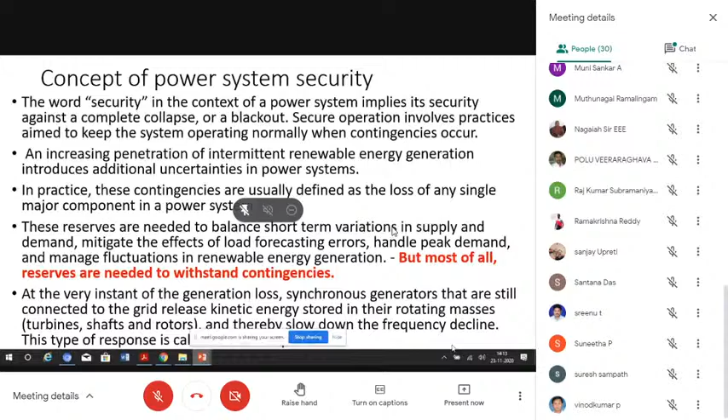If that is disconnected from the grid, or a big load is coming into the grid, then I can say it's a change, a contingency. So how was it managed in the past? Since the generation is a few hundred kilometers away from the load center, there was a big inductance. The inertia associated with the inductance, the high reactance, can itself handle small changes.

That is one thing. Or the big rotating mass associated with the synchronous generator, the rotor of several generators. Let us say hundreds of generators are connected to the main grid. Frequency will not change at all, because a big mass rotating at very high speed, 1,500 RPM, has huge kinetic energy. When there's a small change in load or generation, loss of generation or addition of load, or the reverse.

So when there's a small change, the huge rotating mass directly associated with the synchronous generator will take care. The kinetic energy stored in the rotor will start to supply the energy for the time being. So the frequency and the rate of change of frequency will not change for a moment; the energy will be supplied from the kinetic energy of the rotating mass. This was the case.

Now we are slowly moving towards power electronic converter based power systems. That is our present microgrid. See, I can tell you one very important figure.

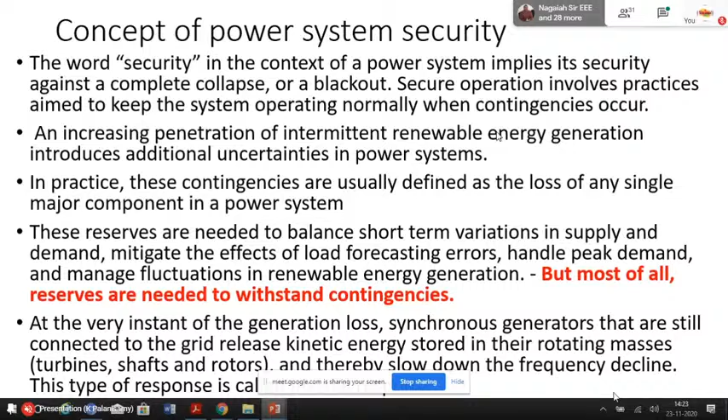So these are the issues, right? And all these discussions are going to take care of that. See, the challenges are enormous, but I'm going to deal with very few challenges. As I told you, the main challenge comes from the displacement of conventional synchronous generators by power electronic converter based RES, whether it is solar PV or wind or whatever renewable energy sources you consider. It is mostly power electronic based, right? Induction generators are very less in quantity as well as overall rating.

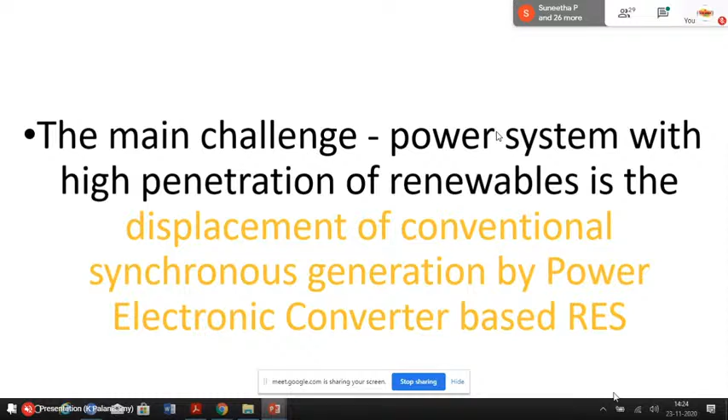Now try to understand. I told you about inertia, right? Kinetic energy and inertia. The kinetic energy E equals half J omega squared. So kinetic energy E is in megawatt seconds, right? Because of this, when there's a change, immediately the kinetic energy stored in the big rotating mass will come into picture. J is the moment of inertia, related to the system, and omega is the angular velocity of the rotor. Higher the rotor speed, the higher the kinetic energy.

That's what I feel about the flywheel, right? In recent years, many energy storage engineers are talking about the flywheel. Mostly flywheels are kept in a vacuum, and made of very light material which can handle very high energy, like reinforced rubber or polymer. Those things can be used at very high speed, right?

And to avoid mechanical losses, it will not be attached to bearings; it will be suspended by something like magnetic levitation. So it runs at very high speed in a vacuum with no friction. When you run at very high speed, it can store more energy, and immediately when you need it, it can supply. That's the kind of flywheel mechanism we are going to have, or are having in some places. Inertia constants for different machines are listed here: thermal, hydraulic. And you can understand it is per MVA. If it is 1000 MVA, per MVA.

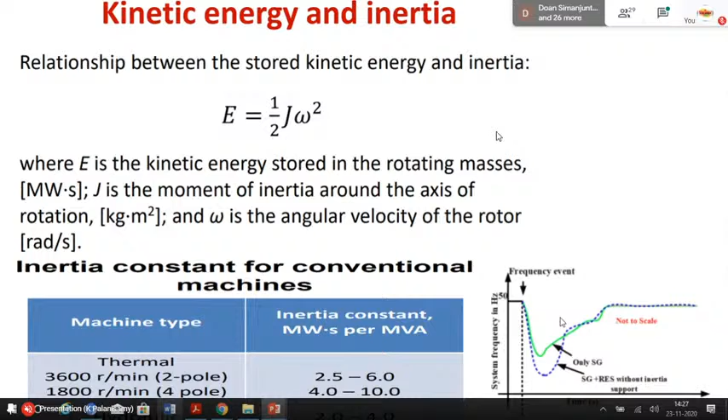Of course, this is the time you are supposed to manage. Okay, right. Now, see, we are discussing about the inertia. That is, absolutely no doubt, a very big problem.

The second one is this, California duck curve, right? What is it? This is actually a load curve. They are talking about the load, or you can say the generation. You can take anything. So from 12 a.m. to 12 midnight, so it means midnight to this midnight.

See, night time, the load is somewhere around 20,000 to 19,000 megawatt, and from 6 a.m. onwards, the California state or region is having more and more rooftop solar PV. They recently added it to a very high extent, it started from 2013, and you can see the decreasing of demand, or the decreasing of required load.

By 2020, it reached somewhere around 12,000 megawatt, but in 2012 or 13 it was around 19,000 megawatt, even more. So somewhere around 8,000 megawatt rooftop solar PV is contributing. So at the mid of the day, somewhere around 11 to 2 p.m., you can see the generation from the solar PV is very good. So you have less demand, right?

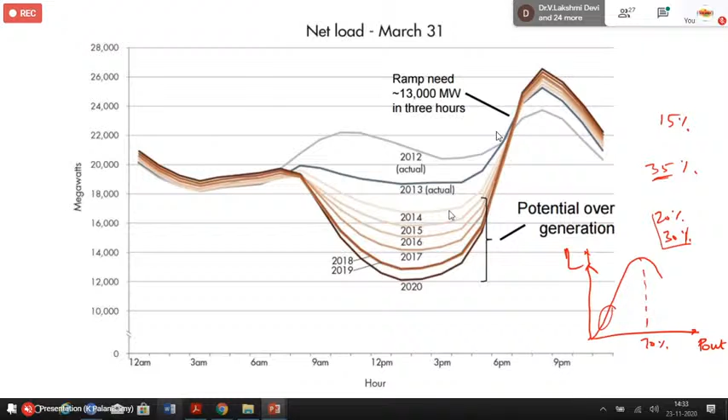Okay, next. See, the curve I have explained was first obtained by researchers from the California state load curve. That's why it is called the California duck curve. And this is what I explained, how the demand increases during the evening time, how we are going to meet it, and different solutions for that were discussed in the literature. Okay.

Anyway, since I was talking about California, you may be thinking that it does not apply to India. You can see this. This is measured by me. I'm a certified energy auditor by the government, covering most of the northern Tamil Nadu region. It was monitored on 22/8/2019, last year, at one of the agro plants. It is actually a milk processing industry, and they have 2 megawatts of solar rooftop PV, and their total demand is somewhere around 3.5 MVA.

In one day, you can see that somewhere around 6 a.m. it is starting, and it is going like this. See how badly it is changing. The first 3 are individual phase output power of one particular solar unit. They have 3 or 4 units like this. I told you it is 2 megawatts, and we have taken from one unit. The maximum power is somewhere around 700 kilowatts altogether, 3 phase. But see here, it is varying between 700 kilowatts and 250. It is changing like this.

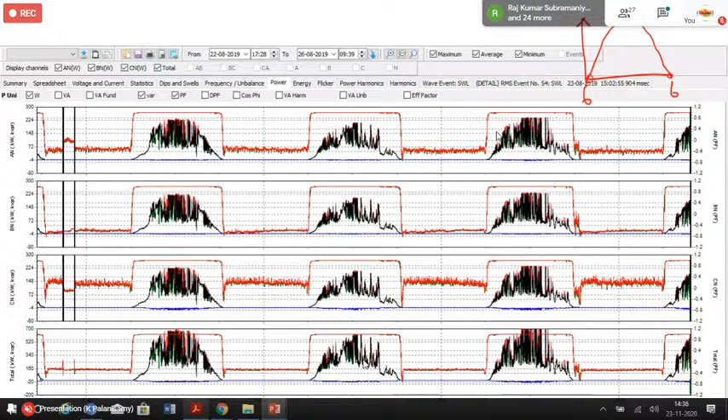But in a real scenario, this is the solar power generation. So you can understand how much lagging we are, right? Even in daytime, from 11 to 1, the so-called peak generation period of solar PV, it is generating like this. It is highly random, highly varying. So you can understand how difficult it is for the grid operator to manage this kind of generation and the overall

load demand, right? And the same thing we have expanded for one particular hour. It is somewhere around 12:15 to 13:58, so around 1.5 hours. Within 1.5 hours, just see here. Of course, this is the total power. It is reaching somewhere around 550 or 560 kilowatt, and suddenly it is coming to around 180 kilowatt. See here how badly it is varying, right?

The black is active power, red is power factor, and the blue is reactive power. See, this is reactive power. So this is unity power factor. See here, it is 1.15 to 0.85. The good thing about solar plants is they will always operate at 0.99 or 1 power factor. That's very good.

And also it will not take much reactive power. Sometimes it will supply, or very little reactive power will be taken by the PV plant. And this is actually the active power. So you can see how badly the active power is varying, right?

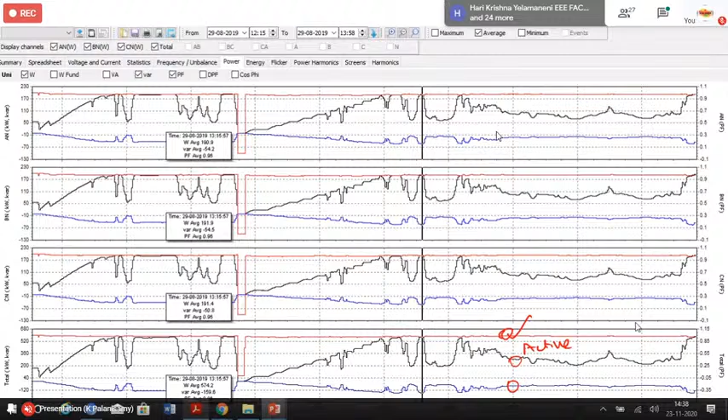Being an academic institute, a university, you may think, sir, you are telling a lie. How can the THD be like this, 40%, 70%? I am not telling a lie. I told you we have a 2 megawatt solar plant. The beauty of a solar plant is, irrespective of the load, it will always generate a good sinusoidal voltage and good sinusoidal current, and of course a unity power factor. In my university, and it is the same for the majority of academic institutes, we replaced almost all of our lights with LEDs.

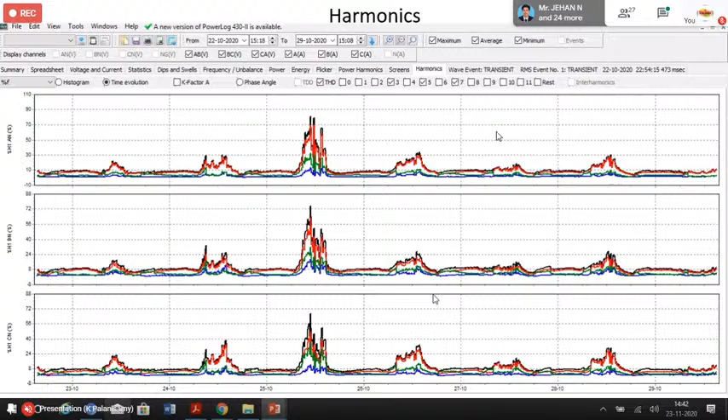We are very happy that we are generating 2 megawatt of solar PV, but on the other side of the story, we are doing like this. We are polluting the grid to a very bad extent. So if at all you are planning for this kind of renewable, you must be taking care of all your harmonics which are generated by your load. Otherwise, this is what will happen. The customer who is very close to you will be badly affected by this kind of waveforms or this kind of distortion.

The next thing. We have discussed, when you have more and more renewable penetration, you should take care of the inertia. At least you must generate virtual inertia from your power converter, and you must take care of the high ramp up or ramp down during the day and night time. Above all, if at all you are going for renewable power, you must have the forecasting. That involves generation and transmission planning, for the grid operator as well as an individual consumer. So generation and transmission planning, you must do it.

Within a very short time, the EB, electricity board, is going to ask you to schedule your generation as well as load. It means you have to commit to the EB: during 8 to 9 a.m. I will take this much power. During 11 to 2 p.m., in the hot summer, I may need this much power. I have to schedule and give it to the EB at least 1 day ahead or a week ahead, depending on the system operator. So you must forecast your load as well as your generation. Only if you do all those things can you have a planning.

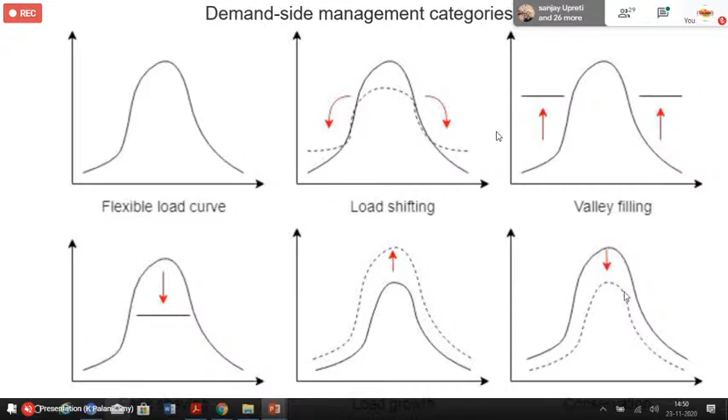Okay, so one is demand side management, right? In that way I can manage the load and demand, meaning generation and demand, or generation and load. The other way, many developed countries, those who are very rich in electricity, are having this kind of thing.

And under each category, I have just listed out some energy storage methods, or you can say classifications. Okay, right. So I told you in energy storage also there are two kinds, because I'm interested very much in energy storage technologies for grid ancillary services, or you can say grid support services. Most of my research is in that area only. So energy storage systems or technologies can be classified into two.

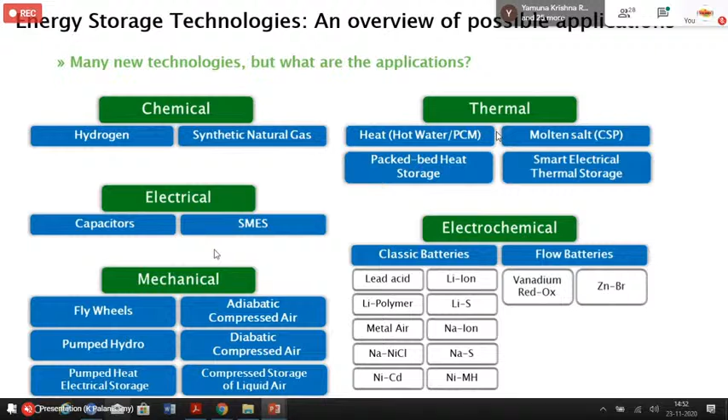Some energy storage systems, technologies, or devices can help for a short time, and if you see the ramp, it means how fast it can charge or discharge from a low level to high power. For example, if the rating of the energy storage is, let us say, 500 kilowatt, the ramp is how fast it can reach from 0 to 500 kilowatt. Similarly, how fast it can reach from 500 kilowatt to 0, or any intermediate stage.

So how fast it can change, it can accommodate the need, whether charging or discharging. That's actually ramping. So some devices or technologies, for example, flywheel, capacitors, supercapacitors, of course. Electric double layer capacitors are supercapacitors. Then superconducting magnetic energy storage, SMES, capacitors, flywheels.

All these three are very fast. It can charge very rapidly. Also, it can discharge. If you want very high rated power in a very short period, yes, you can get it from a capacitor, superconducting magnetic energy storage system, or flywheel. Similarly, the other sources.

For example, if you take a pumped hydro power plant, in Tamil Nadu we have Kadamparai, a very good example of a pumped hydro power plant. During the off-peak period, the induction motor or pump, which is actually an induction generator, will pump the water from the lower reservoir to the upper reservoir. That is Lower Aliyar Dam to Upper Aliyar Dam. That's the Kadamparai power plant, Upper Aliyar and Lower Aliyar.

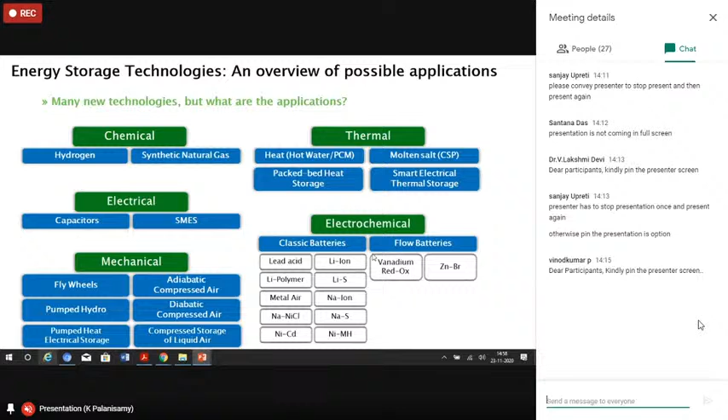Then see, this particular slide is giving a brief idea of the different ways energy storage can help the system, right? See, in generation, energy storage will play a very big role in black start. For example, in a conventional microgrid, if you have different sources, you cannot start some sources, mostly wind or solar. You need the grid, right?

Only if you have a grid, the phase locked loop will find the frequency, and it will produce voltage and current at that frequency, and it will be synchronized, right? So only the energy storage can start the inverter first because the energy is available, and it can dictate the frequency and voltage to the rest of the elements. That's called black start. It means when there is a blackout, out of many sources, which source can start first and give the frequency reference to the others.

That is mostly battery, right? Only battery based sources can start first and dictate the frequency to the other elements. Okay. Energy arbitrage, it can help in that way. Support to conventional generation, yes. And renewables, yes, distributed generation flexibility. This is something like power smoothing, right?

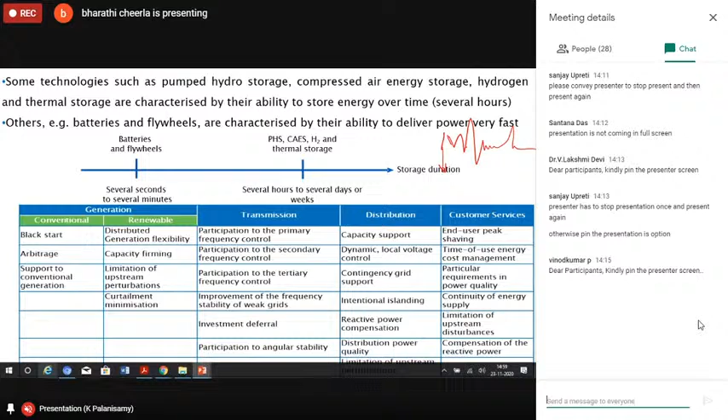See, solar power may be highly dynamic. For example, if you take solar PV, it is something like this, right? I don't think I'm drawing this easily. It's a highly dynamic power I'm representing. But the grid operator, the load, may want something like this. The grid operator may expect you to give power like this. So how do you make this kind of change into a constant power? That is with energy storage.

See, the government is finding a lot of difficulty establishing good transmission lines to take the extra generated power from states with surplus to the states where you have less generation.

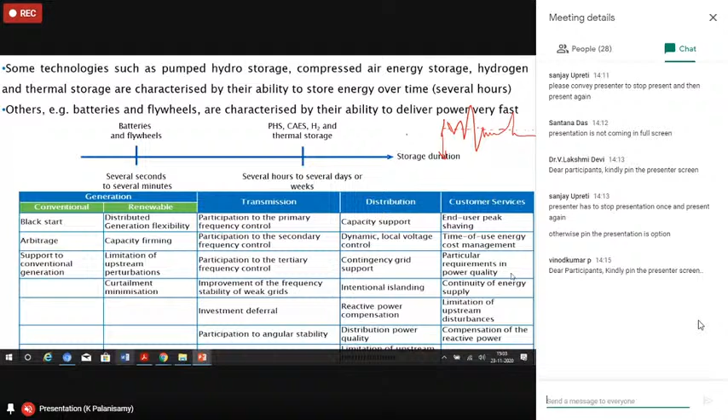Or in the best case, you can even supply to the grid. You can sell the power at a higher cost than your purchase price, right? That is one thing. So that's the time of use energy cost management, and power quality of course can be improved, right? Inertia and other support can be given from the energy storage, right? So this is what I was talking about.

Some energy storage will come for hours and days, and it can store a high amount of energy. So these are called high energy density devices, right? And super capacitors, superconducting magnetic energy storage systems, flywheels, right? All those will support for a very short time, and the rating depends on the technology, the maturity of the technology, right? Even superconducting magnetic energy storage is available as per this in a few tens of megawatts, right? Of course, it can support for a very short time, right?

Lead acid, you can see, NAS, I told you, right? See, India can do great things in NAS because of the availability of sodium sulfur, right? We need not depend on lithium and other things from nearby countries, right? We need not pay much for the lithium, right? So this is available everywhere, okay.

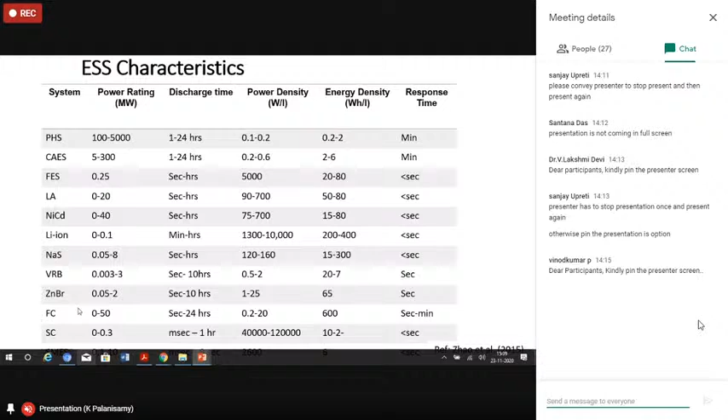Then it will store half LI squared, right? Energy stored in the inductor is half LI squared. Then when you need, the current flow will be taken to the DC to AC converter, and you can inject the power to the AC or at the DC level itself, right? Then again, some more, in a different comparison. So what is the efficiency of different types of energy storage, and what is the capital cost involved?

Of course, see, this slide is prepared based on the 2015 scenario. There will be reduction in all these things, right? Improvement in efficiency, everything. Okay. So, of course, when I was exploring, I was not able to get 2020 or 19 or 18 data. So, since I got this readily, I just put it here.

Okay. Efficiency, you can see, PHS is good, and lithium ion you can see here, and all these things, right? You just see here. Supercapacitor is like a capacitor, so you will have a very good efficiency, and there's no limitation in number of cycles.

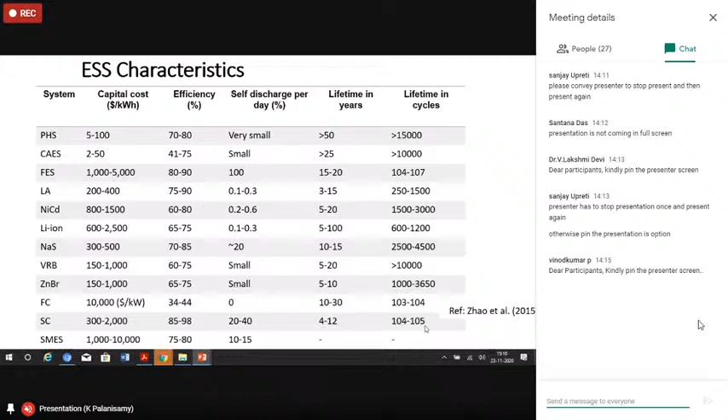Okay, so you can just see here, right? See, though it is given 10^4 to 10^5, it will be much more than that, right? Okay, and again, different parameters are taken and compared for different energy storage devices. We can just go through them after some time.

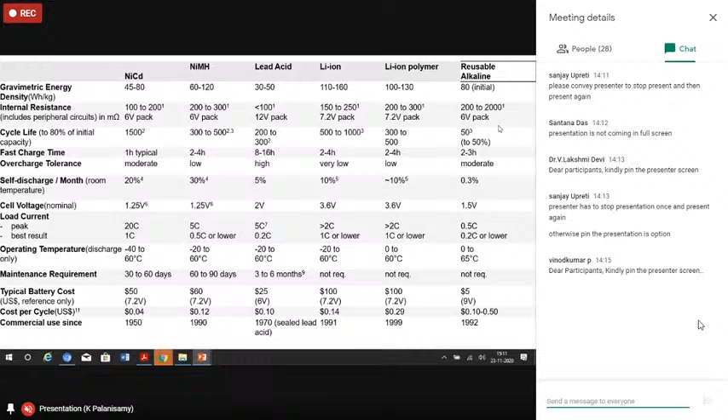Okay. See, we have discussed how I can do demand side management so that I can overcome the variability of the renewable energy sources. And the next thing is, if I have an energy storage, what are the different types of energy storage and how I can take care of the variability with energy storage. Yes, that is also one. And beyond that, by just incorporating some good control also, I can do something about the variability.

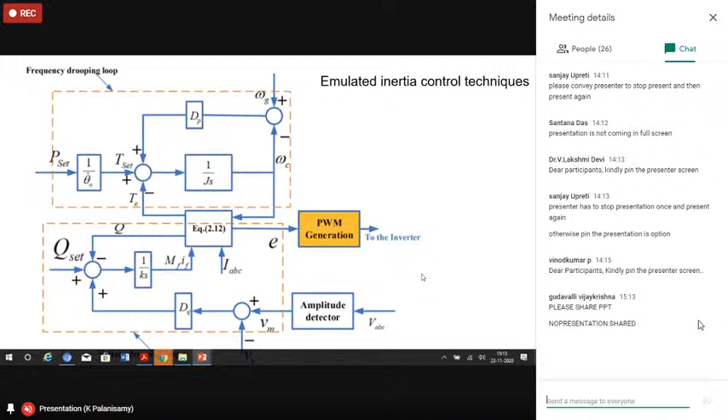This is another thing, we told fault tolerance ride through. So this is one such thing, that is low voltage ride through. See, the wind turbines which have been functioning from before 2000 or before 1990, like 20 or 30 years back, those windmills have a setting such that when the voltage exceeds the upper or lower limit, the windmill will immediately isolate itself. It will stop generating power and come to the off position.

So just imagine, let us say because of overload, the voltage is coming down. By detecting the under voltage, the windmills are cutting out or going to island one by one. So what will happen? It will be a cascade failure. Already there is an overload, that's why the voltage is low. And if windmills stop generating power because of the low voltage, then it is very bad.

So we must incorporate ride through. Even when the voltage is low, your wind generators must be in a position to generate active power. And when the voltage is low, your wind generator should supply some reactive power so that the reactive power will help with voltage improvement.

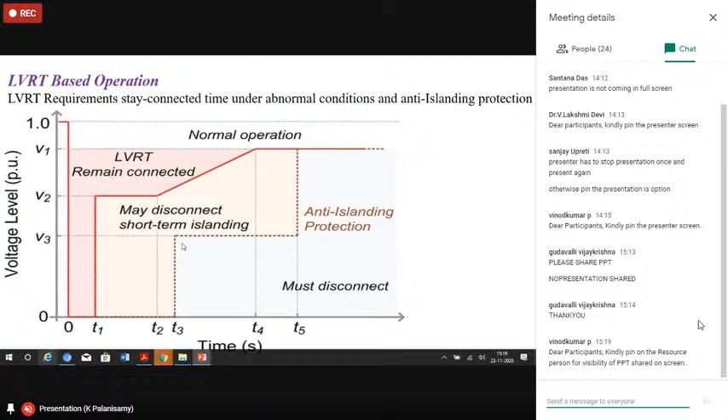So LVRT is also a very important requirement for the recent grid. The grid is smarter, so your devices also should be smart enough to ride through the changes in the grid. And so this is one simple technique to handle the ride through. You can go through it.

See, based on the terminal voltage, or you can say point of common coupling voltage, the amount of reactive power supplied to the grid is decided, right? See, when the change in voltage to the near normal voltage is 50%, you can see from the characteristic, it means when there's a sag or under voltage and the voltage is only 50% of the actual voltage, then the entire rating of your converter must be used to generate the reactive power.

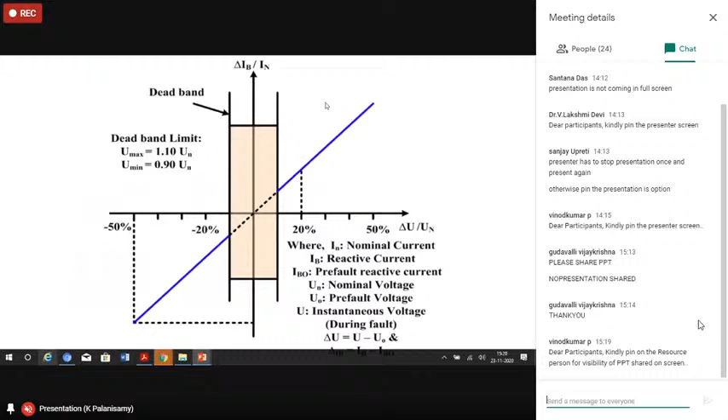I repeat, if the system voltage is only 50%, it means 0.5 per unit, let us say, then the entire rating of your power converter, renewable source power converter, must be used to generate the reactive power and inject. That's the meaning of this, right? And similarly, how the control can be incorporated. See, there are two modes: normal operating mode and LVRT mode, or FRT mode, or HVRT mode, right? Then all those things are taken care. So that's what you are seeing here.

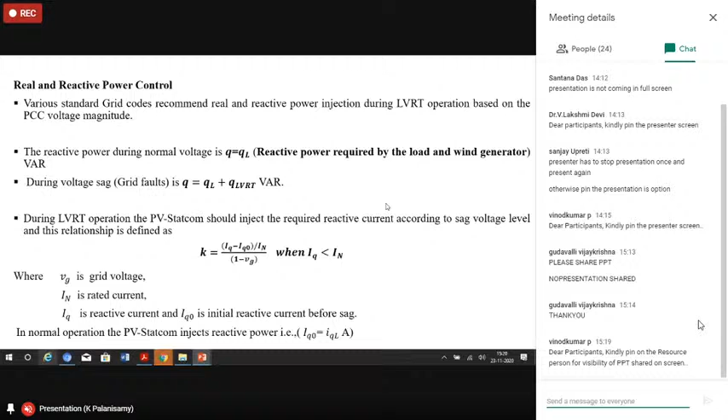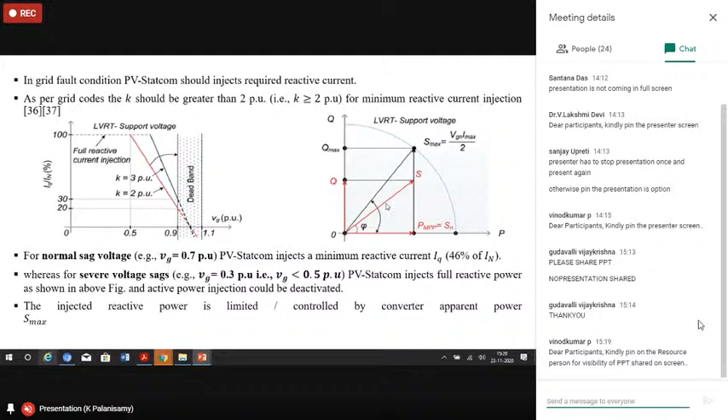Okay, and this is again based on the residual voltage, the control should be operating, right? So that it will take care of the voltage change, right? At the outset, when you add more and more renewable sources, you must have a lot of flexible generators, right? It means maintaining sufficient capacity of the system for planning reserve. When there's a contingency, you must be in a position to supply from the reserve, right?

And how much you are investing and what is the cost behind that, all those things should be worked out, right? You must be knowing that in future you are going to have, like Airtel, Vodafone, something like that. You also have 3 or 4 choices. I need 100% reliable power of very good quality. Yes, you have to pay 7 rupees per unit or 8 rupees per unit. Or some people can say, no, I don't want 100% reliable. I may need only 95%. And power quality also, even something less, I can adjust. Then you have to pay 6 rupees per unit.

And some people will say, no, I'm very poor. I need the power as and when it is available. I'm not worried about the reliability, or I'm not worried about this power quality. Then you may need to pay only 3 rupees per unit. Something like that, I'm just telling you, right? So, because if you have more and more spinning reserve or flexible generation, the cost will increase ultimately. So how are you going to overcome that, right?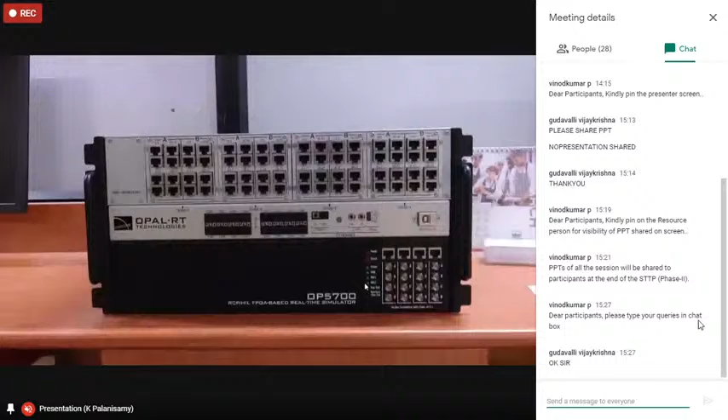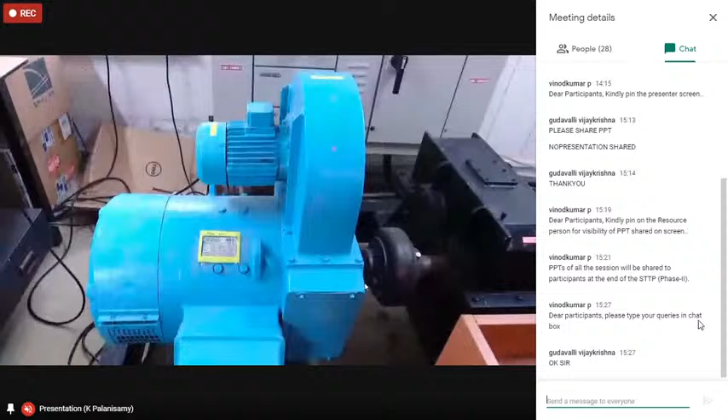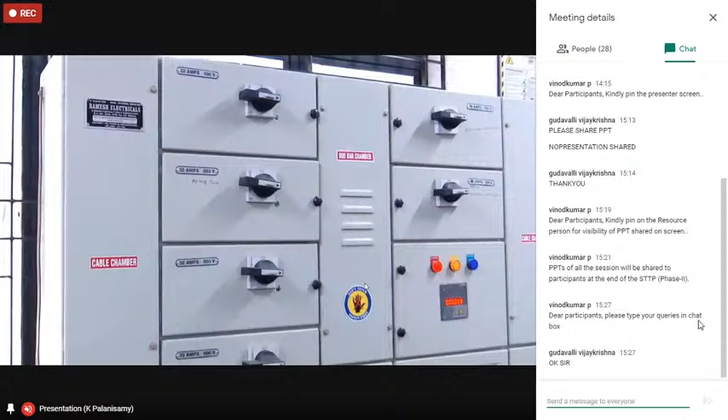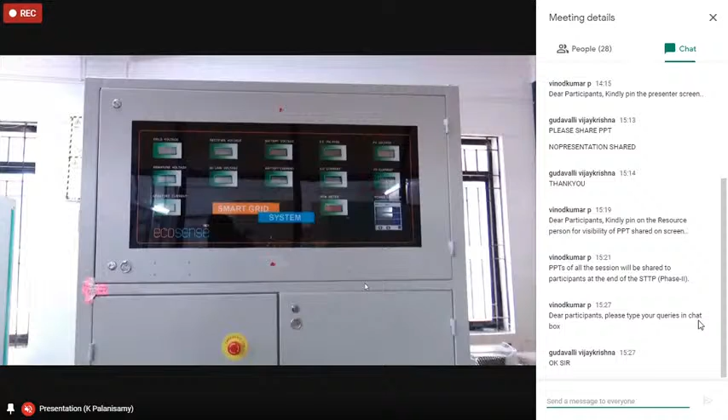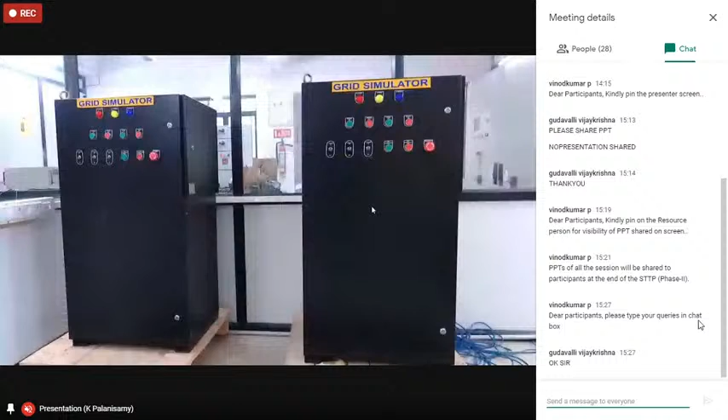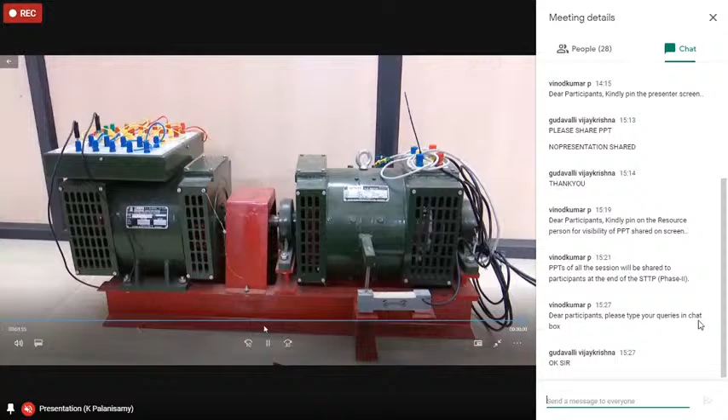Yeah, see, I've just shown the smart grid laboratory which we have developed in our School of Electrical Engineering. That is having 1 kVA fuel cell, 10 kVA wind emulator and solar PV emulator, then 5 kWh of lithium-ion battery, and 160 farad of smart supercapacitors. Then the grid emulator. We have 3 grid emulators, 100 kVA, and 2 others are 11 kVA each.

So, of course, we have OPAL-RT. It's a high-end digital real-time simulation infrastructure from OPAL-RT. So we can realize power hardware-in-the-loop systems. This is something like a controlled environment you can build. The device under test can be anything. The converter you are building, or renewable energy sources you are making. So those things can be just connected, and you can check your developed topology or control algorithm or control technique

with our controlled environment. So this will help you, when there is an overvoltage, undervoltage, or frequency change, to see how your developed inverter or converter can interact in a safe, protected manner with your grid. Whether your control technique or control algorithm is robust, how robust it is, right? So all those things can be tested with our power hardware-in-the-loop environment, right?